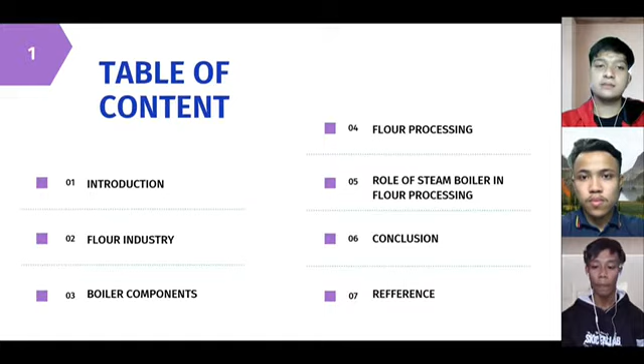Introduction. A boiler, also known as a steam boiler, is a closed vessel in which fluid, typically water, is heated. The fluid does not necessarily boil. The heated or vaporized fluid exits the boiler for use in various processes or heating applications, such as cooking, water or central heating, or boiler-based power generation.

Boilers, or more specifically steam boilers, are an essential part of a thermal power plant. The basic working principle of the boiler is very simple and easy to understand. The boiler is essentially a closed vessel inside which water is stored. Fuel, generally coal, is burned in the furnace and hot gases are produced.

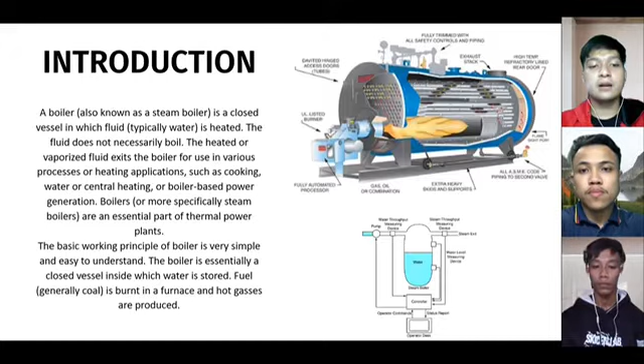Flour industry. Flour is a finely ground powder prepared from grain or other starchy plant food and used in baking. Although flour can be made from a wide variety of plants, the vast majority is made from wheat. Dough made from wheat flour is particularly

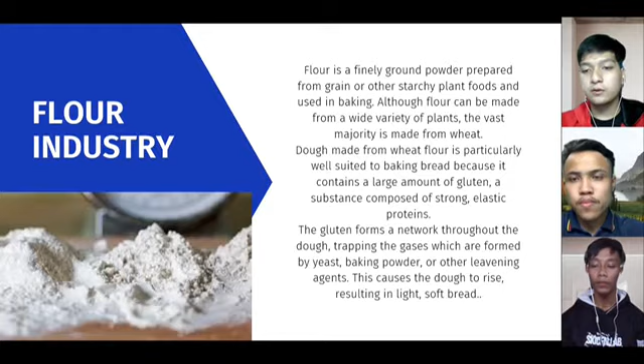well suited for baking bread because it contains a large amount of gluten, a substance composed of strong and elastic protein. The gluten forms a network throughout the dough, trapping the gases which are formed by yeast, baking powder or other leavening agents. This causes the dough to rise, resulting in light and soft bread.

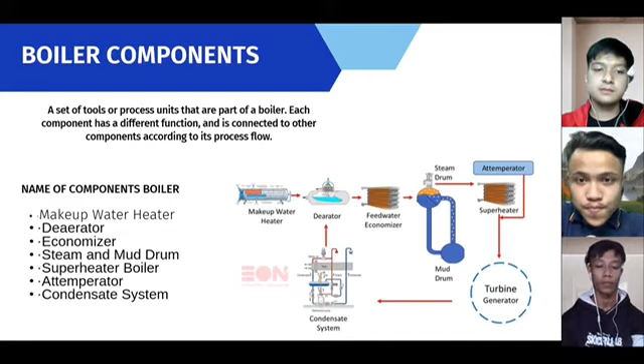First is the process of grading the raw material. Once the wheat grains are received at the flour mill, they are tested for various physical and chemical qualities and graded on several factors, but mostly on their protein content. The wheat is stored in silos until the next process.

Second, purifying the wheat. Before the wheat grains are transferred into a flour mill, the grains need to be free from any unwanted foreign particles. This requires grains to undergo various cleaning processes. After each cleaning process, the grains are checked and if necessary, the process is repeated again.

The next process is preparing the wheat grains for grinding. The purified wheat grains are washed in warm water and dried in a centrifugal pump. The remaining impurities are washed away in this process.

The fourth process, grinding the wheat in flour mills. Wheat of different grades and moisture is blended together to make the kind of flour they are manufacturing. The wheat grains are spun against metal pins in a device called an entoleter. The grains which crack are considered unsuitable for flour manufacturing and are separated.

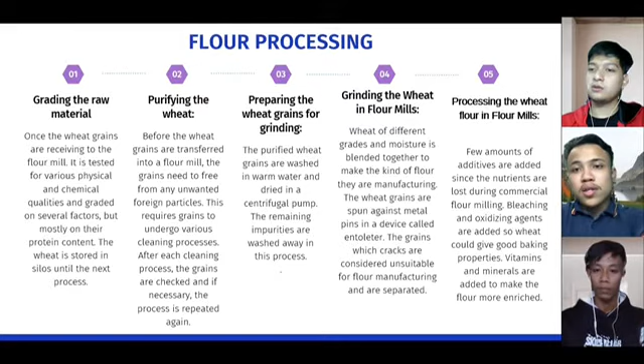Next is the role of steam boilers in flour processing. The equipment used in flour milling is thoroughly cleaned using hot steam and ultraviolet light. The equipment is also treated with antibacterial and antifungal agents to kill any microscopic organisms which might contaminate it. Hot water is used to remove any remaining traces of these agents.

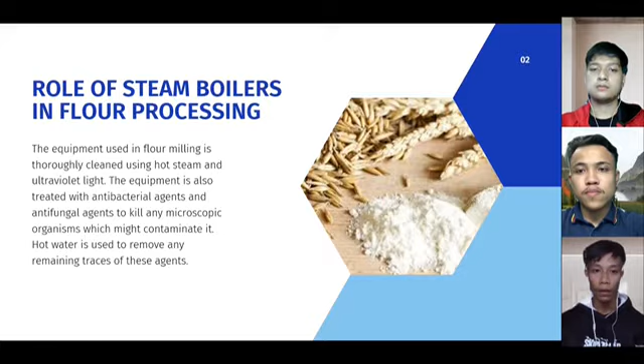The last one is conclusion. A steam boiler is a steam-producing heating system. It produces energy by heating water to create steam. A steam boiler burns fuel to heat water. The combination of heat and water produces steam. Steam boilers are defined by their construction, portability, types of tubes, types of fuel, and the pressure they produce.

A steam boiler absorbs heat that is released from combustion. The three ways that the heat is transferred are radiation, convection, and conduction. The designs and types of steam boilers widely vary depending on their construction and purpose.